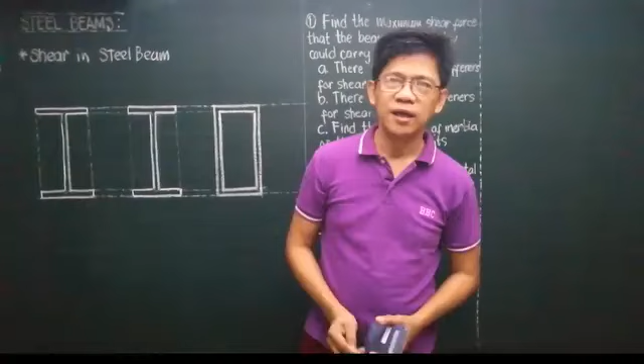Let's pray. Almighty Father God, thank you so much today. Thank you for the blessing, the goodness. Thank you for all your provision, all your kindness and love, and taking care of us. Holy Spirit, we acknowledge your presence, even in way of this virtual review. We praise you and we glorify you. May you strengthen us always. In Jesus' name we pray.

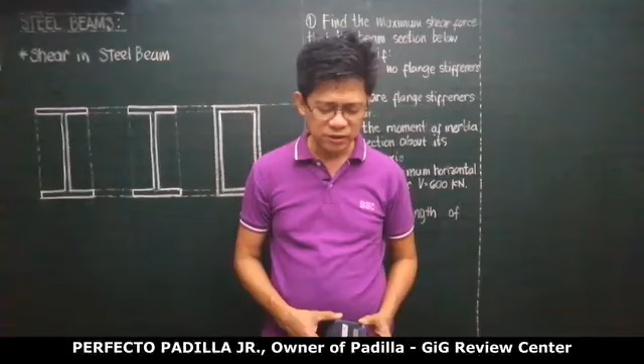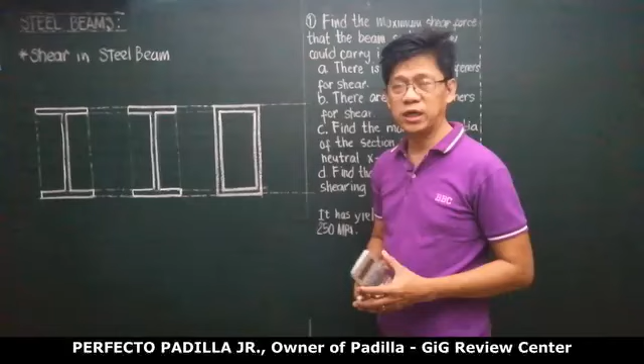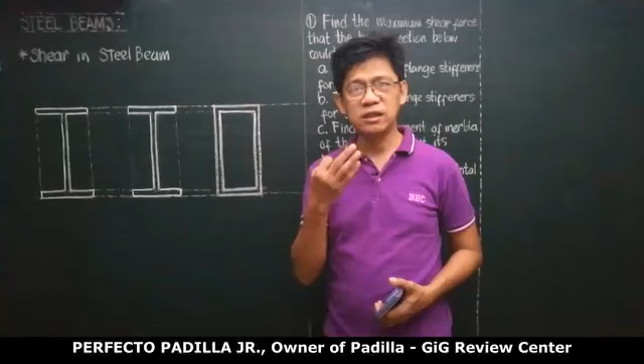We have four kinds of stress in a beam: the vertical shear, the horizontal shear, the flexural stress, and the fourth is the axial stress.

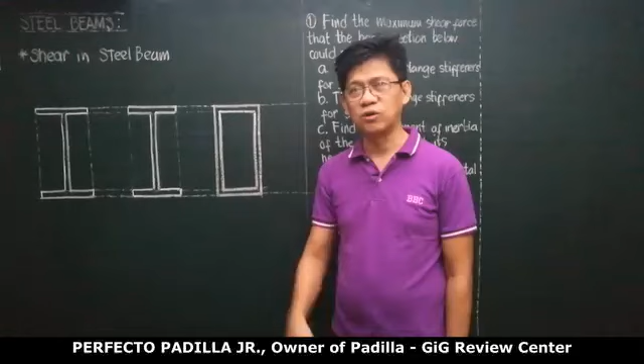So let me begin with shear in a steel beam, specifically vertical shear. Remember that stress exists only if there is resistance. If there is no resistance, there is no stress. Now, suppose I apply a vertical force here on this beam, and our reaction will be here. Okay, let me move this away so the figure isn't confusing.

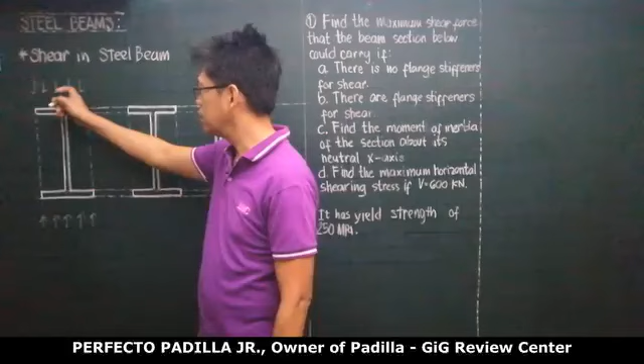Now, because of this vertical force and this reaction, remember that steel beams are made up of thin elements that are joined together. That is the way to capitalize on the high strength of steel but low weight. So here now, the main problem, because our material is composed of thin elements, our steel beam's normal failure is not cracking, not breaking, not tearing, but rather the failure is folding.

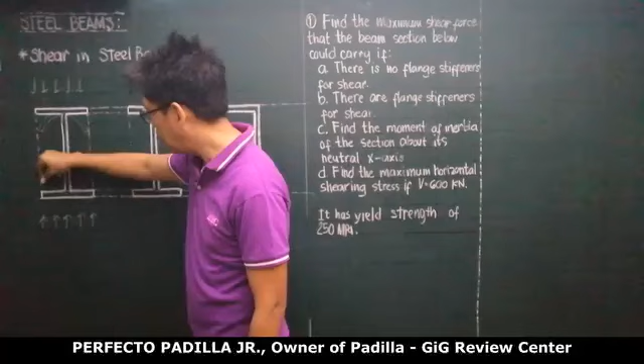So what will happen now, these elements, because they are unstiffened, meaning one edge is hanging free, what will happen is this will simply fold. So it has no genuine resistance in this direction. So this will fold here now. That means these elements, called the unstiffened flanges, will not take part in resisting the shear.

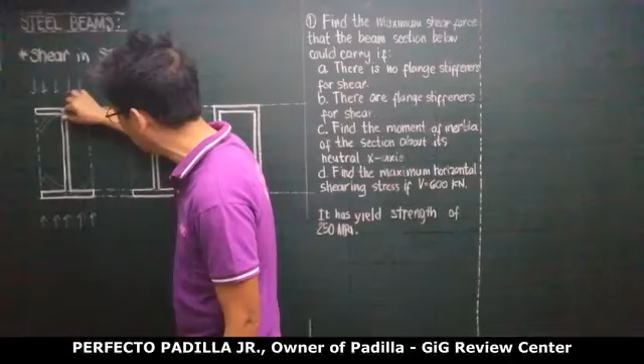The effective section here will just be the web. So the area we use here will be just the thickness of the web times the total depth of the section. Got it? That is for vertical shear. I will explain later the horizontal shear.

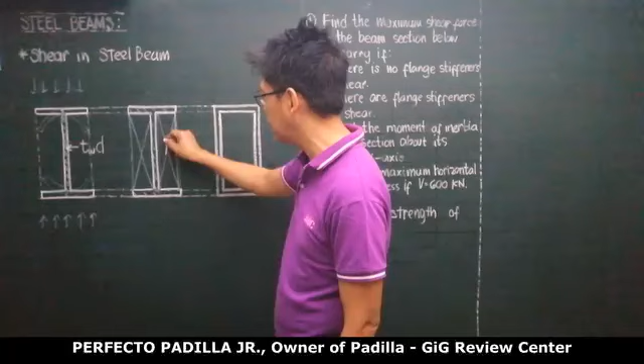So in order to utilize this, what we do is we put a flange stiffener. So our flange stiffener can be full. Okay? So if our flange stiffener is full, meaning it will strengthen or prevent folding of these unstiffened flanges. Because of that, the entire section will be effective in resisting shear. In this situation, our area for resisting shear is the entire area of the wide flange section, or the I section, or the H section, whatever it is.

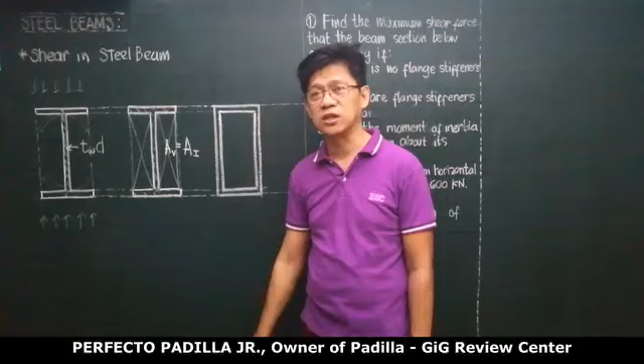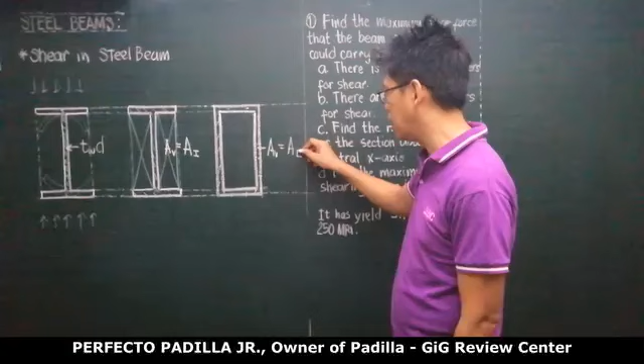Now if our section is a box beam, there is no unstiffened flange. So in this situation, the entire section is also effective in resisting shear. So our A for resisting shear is the entire area of the box section. Do you follow? Okay.

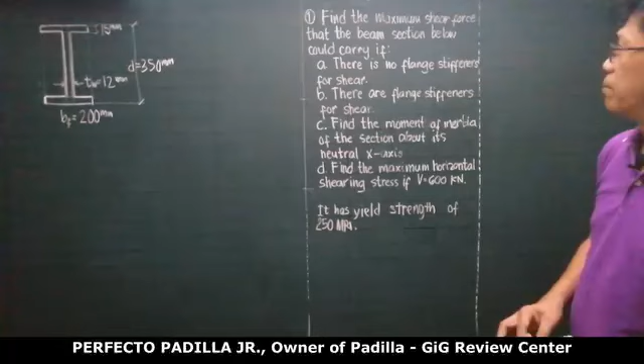Let us have this example. We're asked here to find the maximum shear force that this beam section could carry if there is no flange stiffener for shear. So obviously what we're looking for is the maximum shear force. So we will just examine it for safety in shear.

So in design, we have a universal formula used for safety. This is what I call the safety equation. For the beam to be safe, I will use an acronym here, TBS. In order to be safe in shear, there is only one requirement here.

The maximum FV actual must be less than or equal to FV allowable. Normally in design, we use lowercase letters for actual, and capital bold letters for allowable. Alright, so here, the FV actual is the maximum shear force over the effective sheared area, which must be less than FV allowable. As per NSCP, the FV allowable is 0.4 of Fy.

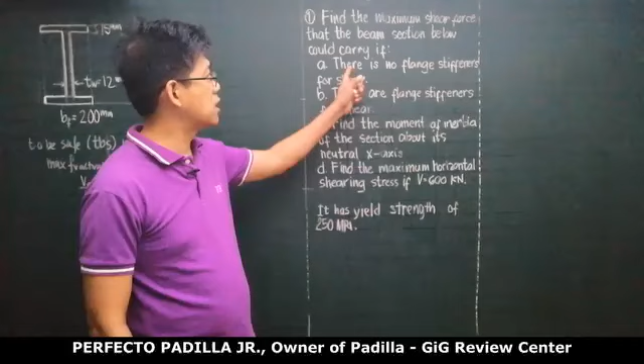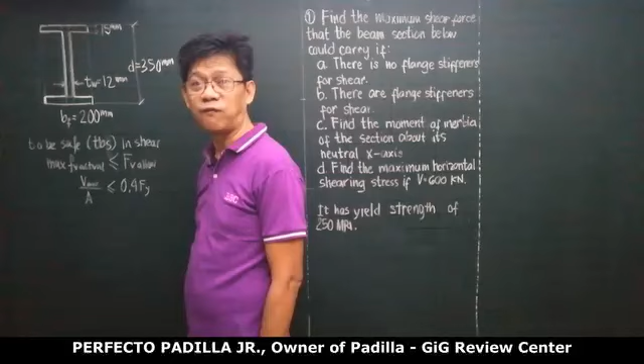So here we have Fy, which is 250 megapascal, the yield strength of steel. And all we need here is the area. In the first situation, there are no flange stiffeners, meaning due to vertical loads and reaction, these unstiffened flanges will just fold. So there is no genuine or real resistance to vertical force.

So therefore, the effective area for shear is just this web. So you have Vmax over the effective sheared area, which is D times thickness of web, 350 by 12, must be less than or equal to 0.4 of Fy, 250. So 0.4 times 250, that's 100. Therefore our Vmax here is going to be equal to or less than 420,000 Newtons, or 420 kilonewtons. Understood? Okay. Now the question in letter B, what if there are flange stiffeners?

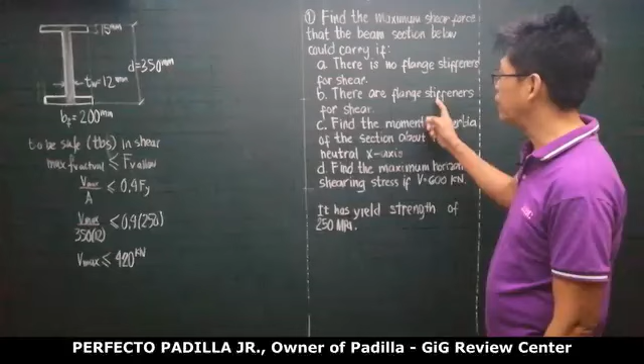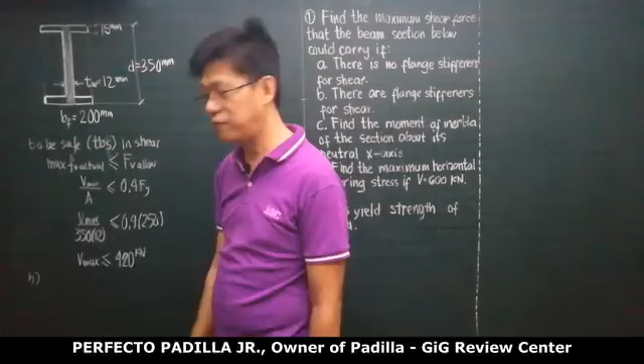If there are flange stiffeners, meaning the entire section will be effective in shear, the full section. Once there are flange stiffeners here, this will no longer fold, right? So what happens is the entire section will be effective. So therefore you'll have Vmax over the entire area. The entire area is still 350 by 12, but plus the flanges, the stiffened flanges.

So this would be, how much is this? This is 200 minus 12. What is 200 minus 12? Let me place it here. So 200 minus 12, that is the net width times the thickness, 15. So there are two of these, one on top, one on the bottom. So therefore, times 2. So this must be less than or equal to 0.4 times 250.

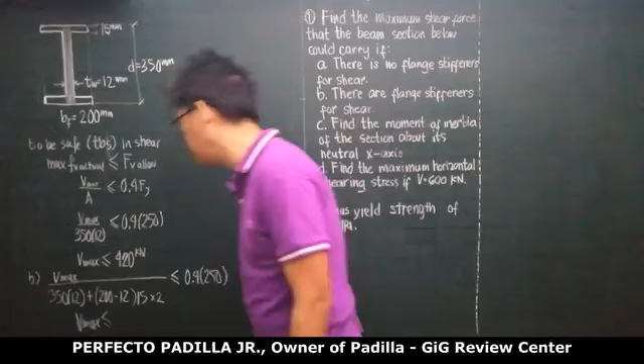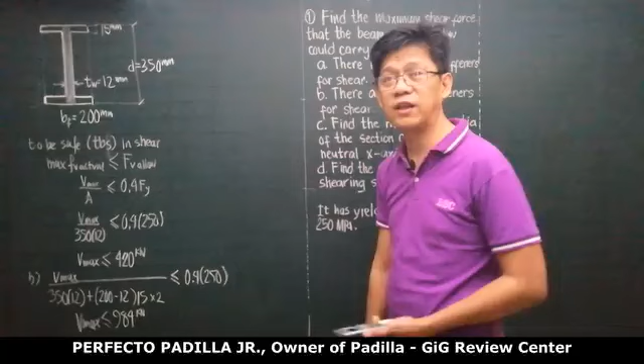In this equation, our Vmax allowable will be bigger. And that would be, so this is 984 kilonewtons. Do you follow? Is it clear? Okay, please copy.

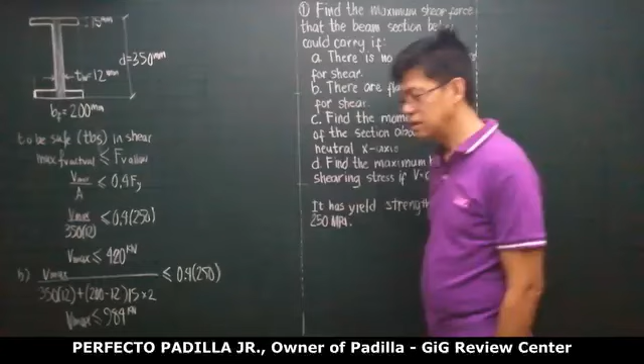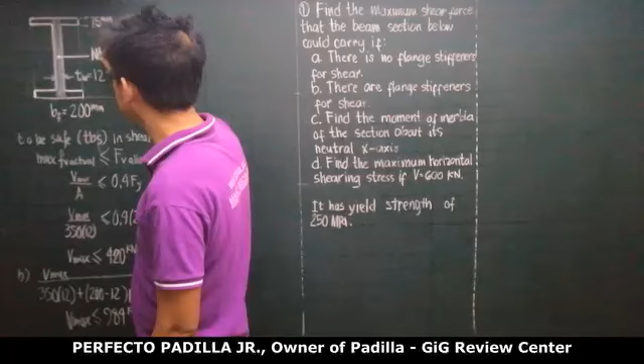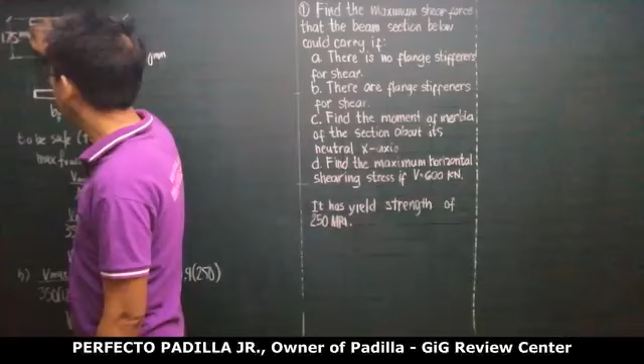Ang susunod na tinatanong sa atin, letter C, find the moment of inertia of the section about its neutral x-axis. So ang neutral x-axis nito, of course, nandito yung centroid. Kung ito 350, this would be 175, di ba?

Okay, hinahanap sa atin yung moment of inertia about that neutral x-axis. Solving it, take note that the area of the wide flange, yung I mismo, is simply area of this rectangle minus area of this hollow rectangle. Parehas lang yung location ng centroid nila dahil this is an axis of symmetry. So this is area of outer rectangle minus area nitong two hollow rectangles na pwede na lang natin pag-isahin.

So minus area nung hollow rectangle, which actually is this area minus itong web sa gitna. So we can now say therefore that I of the wide flange about the neutral x-axis is going to be I nung outer rectangle minus yung I ng hollow rectangle about the same x-axis.

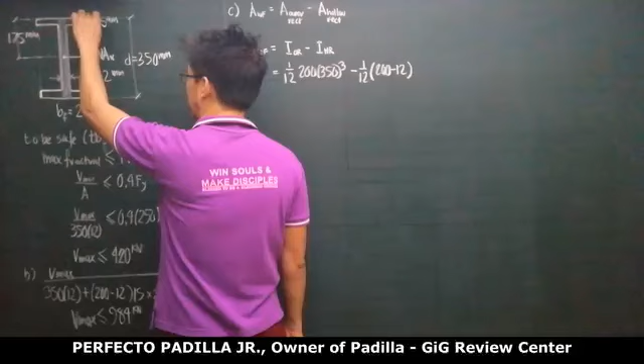So this is going to be 1/12 of base times height cube. So the base is 200, the height is 350. So this is 200 by 350 cube, minus yung hollow rectangle, 1/12 the base. Its base now is simply 200 minus 12, yung net width, multiplied by height cube, yung height niya is 350 minus 15 minus 15. So this is 350 minus 2 times 15 cube.

So you compute this and you will get this as 201.218 times 10 to the 6 millimeters to the 4th. Kuha? Okay.

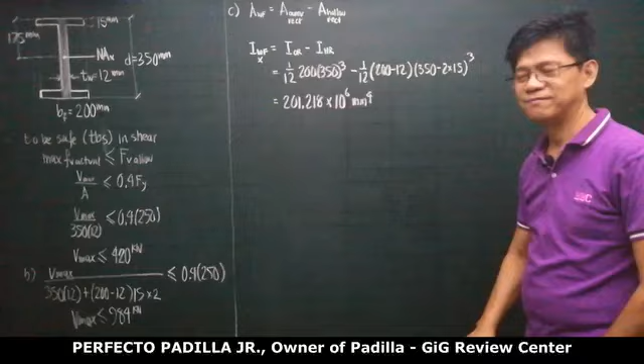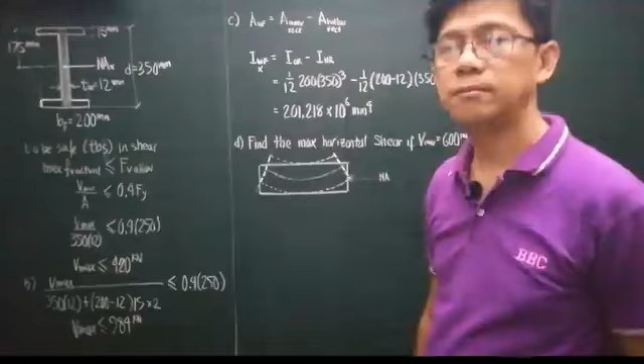Now we are asked here in letter D to find the maximum horizontal shear stress if V max is 600 kilonewtons.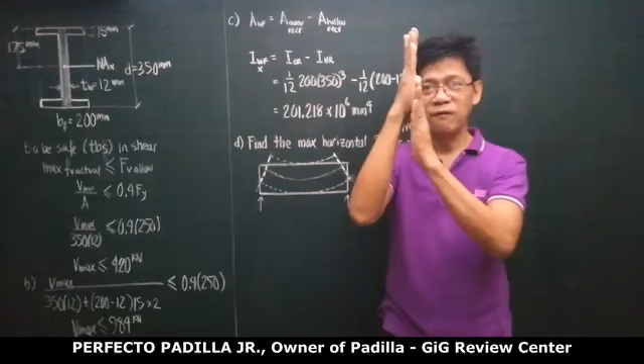What is horizontal shear? Ito yan. Kung yung beam is subject to vertical force, ito yung beam. Meron kang vertical force dito, meron kang resistance dito, di ba? Ito yung reaction, so meron kang push down, meron kang push up. So yung opposite forces na yon, push up and push down, it subjects its vertical section to what we call vertical shear. However, there is another shear that exists called the horizontal shear stress.

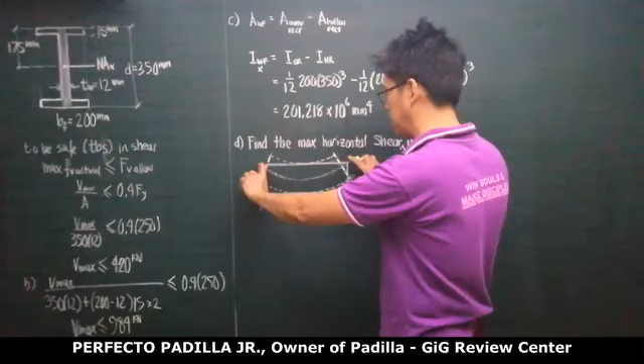And what is this? Ganito yan. Pag yung beam mo nag-bend, let us say ito yung original beam natin, then you load it, you allow it to bend. So para hindi tayo masyadong mahirapan sa pagtingin, i-maintain natin yung position nitong nasa gitna. Okay, ito yung neutral axis natin. Pag bend nito, take note yung neutral axis will remain kung gaano to kahaba, ganun pa rin to kahaba.

Right, yan kasi yung neutral axis natin, ito yung bent neutral axis. However, pag bend nito, iigsi yung nasa taas, hahaba yung nasa baba, right? So we say that this is in compression, ito is under tension. But within the elastic limit, take note, yung ating material will always tend to return to its original size and shape. Ito umigsi, ito humaba.

So gusto niyang magbalik. Ito gusto niyang bumalik sa diretso at longer than this position. Ito naman gusto niyang bumalik sa diretso at shorter than this direction kasi humaba man to. This obviously is longer than this, right? So gusto nitong bumalik sa mas mahabang posisyon. Ito gustong bumalik sa original na mas maigsing posisyon. So this one tends to move outwards, ito tends to move inwards.

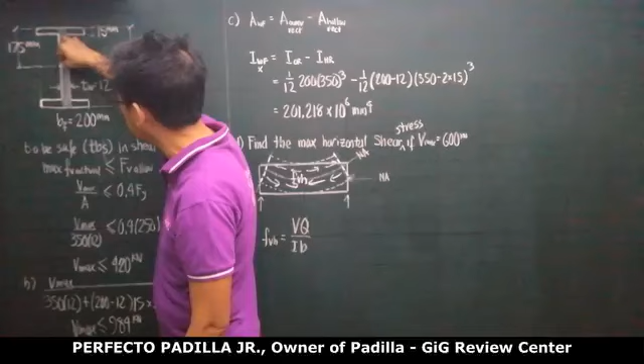Hindi ko na-derive yung formula, ha. So yung ating horizontal shearing stress is given by VQ over IB. Yung V, 600. Yung I about always the neutral axis. Ito yun. Yung B, take note, since maximum yung shearing stress at the section dito, yung V dito, yan yung B. In this situation, our B is going to be equal to the thickness of web. This is 12. Meron na tayo nito.

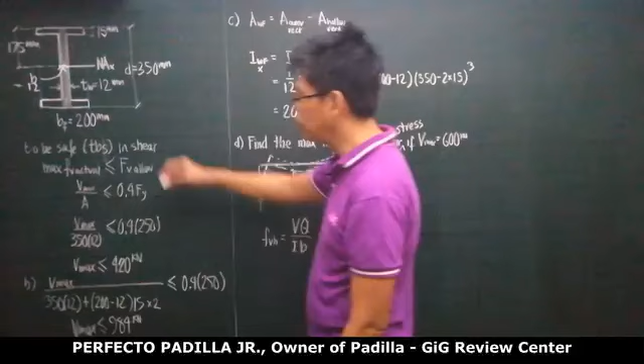Ang kailangan na lang yung Q. But what is our Q? Yung Q natin is simply the summation of moment of area about the neutral axis, pero yung area either above or below the section, so times Y about the neutral axis. Now kung ito yung section natin, yung area above, ito, yung T na yan, yung area below, yung T na to. Yung moment of this area about NA, obviously because of symmetry, is also equal to the moment of area below. So let me just consider the area above for illustration's sake. Ito.

That one, so hatiin ko yan sa dalawa. Etong area na to, ito na lang, ganito na paghati ko. Kung ito ay 175, ito ay 15, this must be what? 175 minus 15, 160. No? So, therefore, etong area na to, this area is 160.

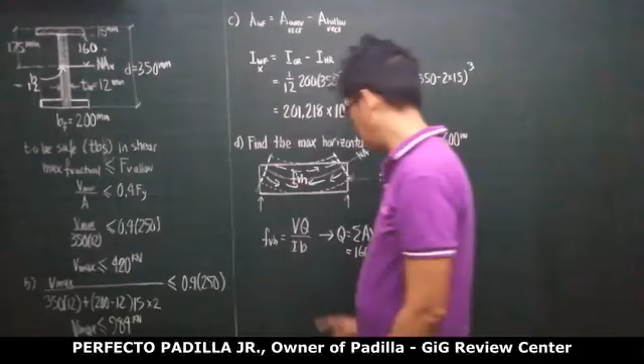This is 160 by 12 times its moment arm about the neutral axis. Ang centroid niya nandito. Kung 160 to, then this must be 80. No? Plus, this portion, eto, isang buo to, di ba?

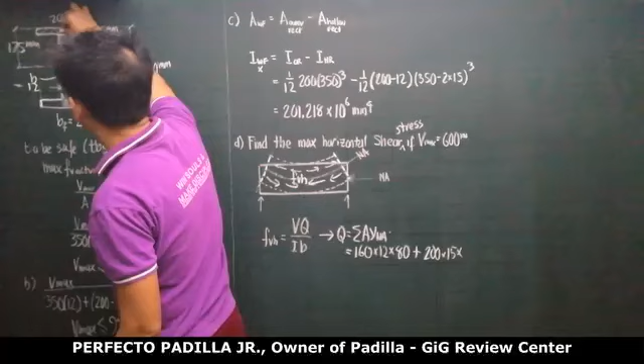Ang paghati ko kasi, eto, saka ito. So this will be 200 by 15 times its moment arm. This is 160. Ang centroid niya ito. So yung moment arm niya must be this one. So it is 160 plus 1 half of 15, that is 7.5. So the moment arm is 167.5.

So therefore, if you compute this, you will get here 656,100. Naintindihan? And the unit is area times Y, millimeter cube.

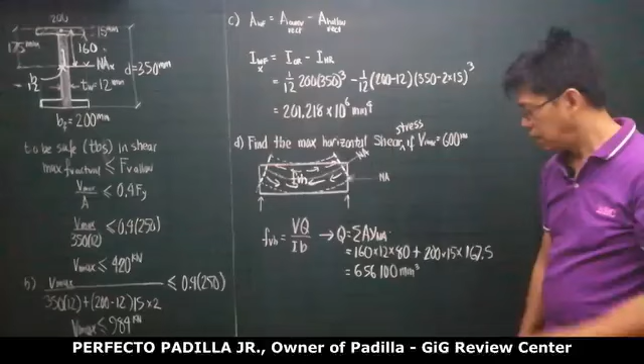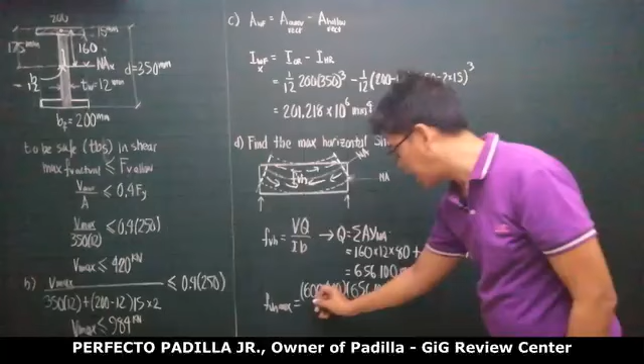So substituting here, our FV horizontal maximum must be V maximum 600 kilonewton, or that is 600,000 newtons, times our Q, 656,100 over I. The I is 201.218 times 10 to the 6 millimeters to the 4th times the B.

The B is 12. So you compute this and you will be able to get this as 163.03 megapascal. Naintindihan? Okay.

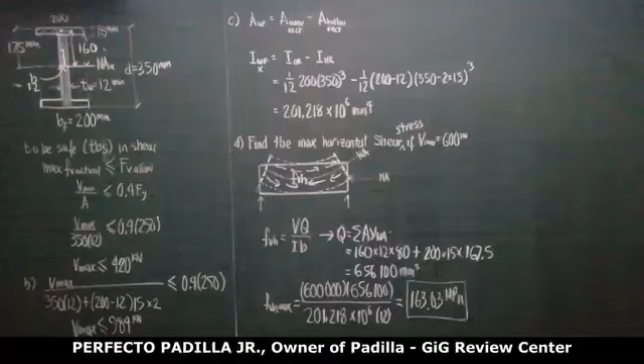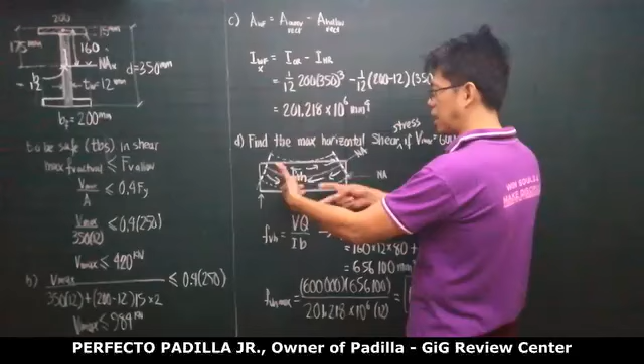Now there is a third kind of stress, yung tinatawag nating flexural stress. As you can see, di ba sabi natin, pag nag-bend to, iigsi to, hahaba to. Umigsi to because of the compression here, humaba to because of the tension here. Right? And take note, etong bending na to is brought about by moment.

So ang ibig sabihin, meron kang moment, for example, ikat natin tong section na to, meron kang moment in this direction, dapat yung ating section will react in such a way to produce a counterclockwise moment. No? Kaya dito, ang reaction natin is, kung ito yung neutral axis, every element of this will produce counterclockwise moment about this section or about this axis.

So yung taas will produce compression. Ito will produce tension. Kasi this one will be counterclockwise about the neutral axis. So tension yung baba, compression yung taas.

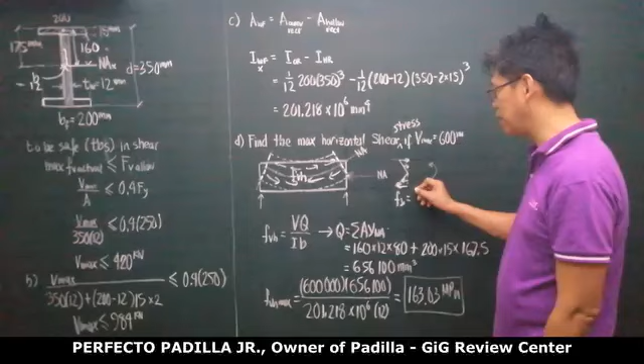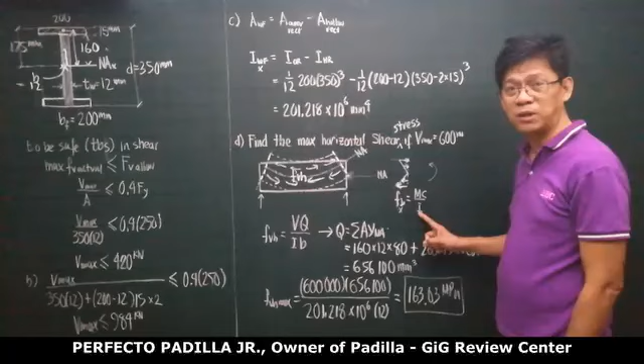And this is given by, yung FB is given by MC over I. Kung ito FB about X, this is moment about X. Kung ito FB about Y, this is moment about Y. Kung ito FB about Z, this is moment about Z. And I will be respectively IX, IY, IZ. Yung IZ na tinatawag is also known as the polar moment of inertia.

Now paano natin sinosolve yung allowable bending stress sa beam? Yun lang yung madadagdag sa topic ng steel design as far as flexure is concerned. Paano nga ba?

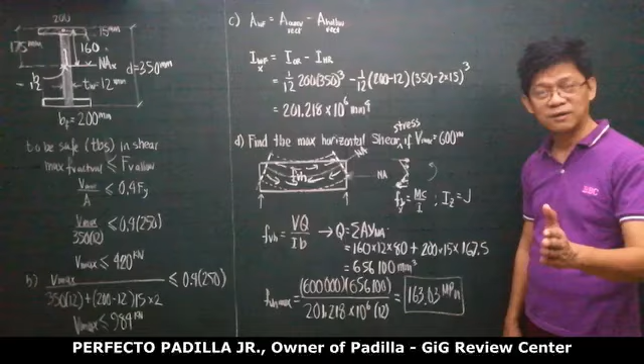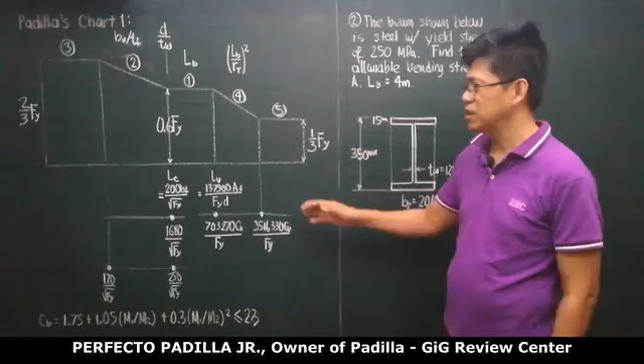How do we solve our allowable bending stress according to AISC or our NSCP, National Structural Code of the Philippines? Marami yung mga provisions na yon, pero I summarize it with this chart, the Padillas chart. So para tong hagdan, no? 3 steps, pero merong slide, 2, no?

So ang tatandaan natin, katulad ng sabi ko, sa steel section, ang failure niya, bihira ang tearing or breaking. Kadalasan, ang failure is due to folding. They may also be called crippling. Okay? So dito, kaya nagfo-fold ang isang element dahil mahaba at manipis.

So tandaan natin 3 dimension ang beam. Isang longitudinal, isang thickness, isang width. Okay? So ang pinakamahabang dimension ng width is the length. Pero take note kung ito yung beam natin. Halimbawa, ito yung beam section, di ba?

So ito, kung nandito yung support, this is the loading. Yung bending in this direction is expected, kasi talaga namang nandyan yung load. Pero meron tayong tinatawag na lateral bending. Okay? So pwedeng mag-bend yan laterally kahit ang load nandito due to length.

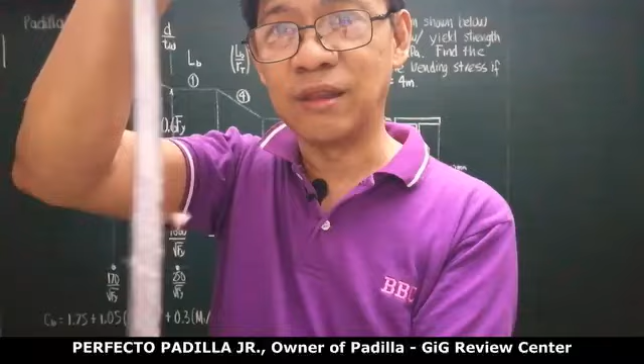Kahit na i-load ko yan dito, nagbe-bend siya dito. Pero ang load na ina-apply ko pag ganito, ang moment na ina-apply ko pag ganito, pero kahit na ganun ang load, yung beam magbe-bend laterally. Yan yung tinatawag natin na buckling. Wala kang in-apply na load dito, pero may bending in that direction.

Pag nag-buckle yung beam natin, imagine ganito yung beam. Eto ha, ang load nandito. Pero kung yun ay nag-buckle dahil sa load, nag-buckle ng ganito, nandito yung load, hindi ba magkakaroon ng twist pag ganito? You get it? So magfe-fail yung beam.

Ang pinaka-critical sa beam is yung longest dimension niya, yun yung tinatawag nating LB. Yung LB may be different from the span. Kasi ang span ito, vertical support to vertical support. Pero ang LB, yan yung distance between horizontal braces. So kung walang horizontal braces dito, walang horizontal support, then LB is equal to the span.

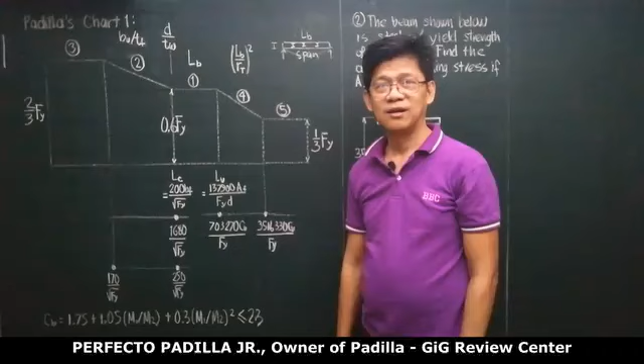Pero kung meron kang halimbawang auxiliary beam dito sa gitna, so ang LB mo, 1/2 of the span. Kung meron ka every quarter na support beam, lateral beam, then ang LB mo is 1/4 of the span. Naintindihan? Now, magbabakel yan laterally if LB is too long.

Ano yung long, ano yung short? Dapat ma-define. So i-define yan ng NSCP. Ang entry point natin dito sa Padilla's chart is etong region 1. Ang tatandaan nyo lang dito, madaling kabisaduhin yung code, basta alam nyo tong Padilla's chart, no? Ang FB natin varies from a maximum of 2/3 Fy to a minimum of 1/3 Fy.

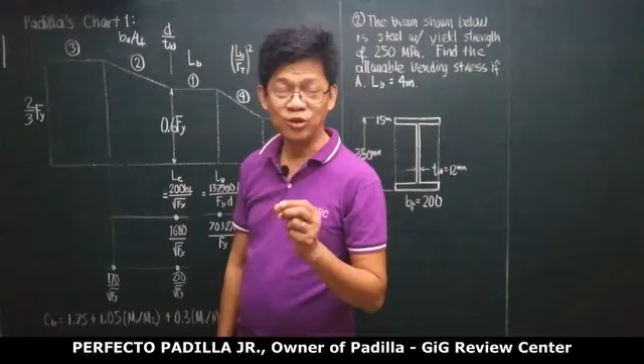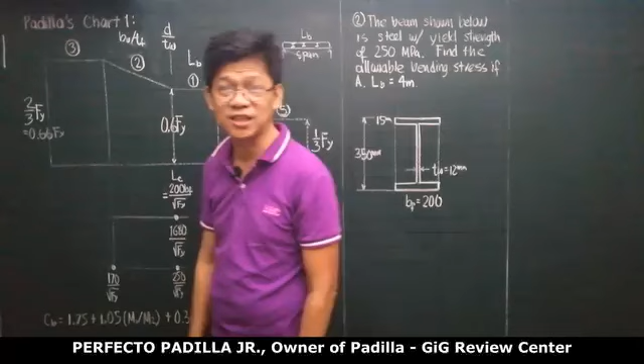So dito, yung 2/3 Fy, however, hindi nyo to makikita sa libro. Ang makikita nyo sa libro is 0.66 Fy. Kasi yung 2/3 ay 0.66666666 Fy. Lumagay sa conservative yung AISC, ginawa nilang 0.66. Pero ang exact value niyan is 2/3. Ang sabi ko, exact value based on the spirit or logic ng code, ha? Sa pagka-analyze ko lang ba?

Ngayon, dito, kapag yung ating LB is less than LU, ang standard natin na ginamit LU. Madali mo rin tandaan, yung mga NSCP or AISC limits sa kaliwa ng region 1, puro over square root of Fy. Dito sa right side, puro over Fy. Naintindihan? Yung nandito, square root of Fy family, eto, Fy family. Over square root of Fy, eto over Fy. Now, dito sa kaliwa, yung LB, you've got to check it also against LC.

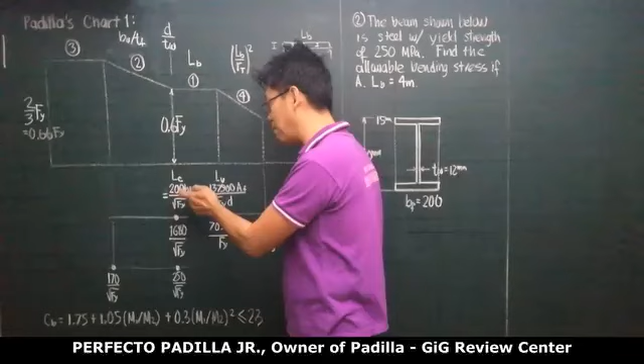Yung LC, isipin nyo lang si LC, eto yung babaeng 200 ang boyfriend. Grabe, no? Yan si LC. So yan yung lateral length para sa maturing na compact. Kaya LC, ito yung lateral length para ma-consider na supported. Okay. Now, pag yung LB is less than LC, ibig sabihin hindi yung critical sa lateral buckling.

Naintindihan? So and candidate yan for compact. Okay, pag-aralan muna natin to para makita nyo. The beam shown below has yield strength of 250. Find the allowable bending stress if LB is 4 meters, or 4,000 millimeters.

So una, i-check natin yung LB saka yung LC. Yung LC natin, ito yung babaeng 200 ang boyfriend over square root of FY. So therefore, this is going to be 200 times BF, 200 over the square root of 250. So you compute this, your LC is going to be 2529.8, the unit is millimeters. Parehas siya ng unit ng ginamit mong BF. All the quantities are dimensionless lalabas, ha? So therefore, this is LC.

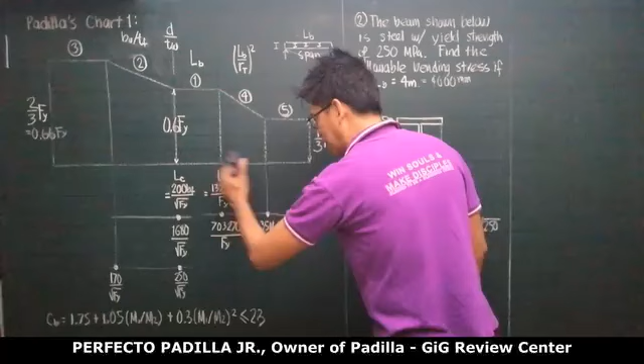While our LU is equal to 137,900 — lahat ng odd one-digit variable or number nandito except the middle, yung 5. So, 137,900 AF over FYD. Yan yung ating LU, ha? Yung nasa kaliwa over square root of FY, yung nasa kanan over FY. Parang 137,900 AF over D over FY, ha? So therefore, this is going to be 137,900 AF.

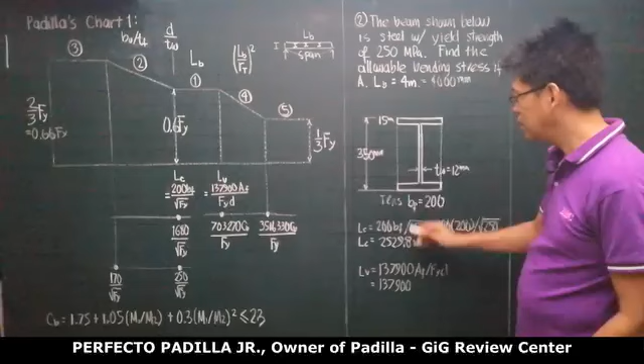Yung AF na binabanggit dito, hindi yung lahat na lang ng AF. Yung AF na binabanggit dito, area of compression flange, no? So dito, take note, pag bend nito, pag ganito, etong nasa baba is under tension, etong nasa taas is under compression, di ba? So yung flange under compression, ito lang yon, isa lang. So therefore dito, yung flange under compression is 200 by 15. Hindi mo imumultiply ng 2. Yung under tension kasi, hindi yan magbe-bend. Imposibleng ang isang bagay, hinatak mo tapos nag-bend. Hindi magfo-fold or magbe-bend yung portion under tension.

Okay, now dito over FY is 250 times D. Ang D is 350. So you solve this, makukuha mo na yung LU is equal to 4728 millimeters once you compute this. Notice na ang LB natin, our LB which is 4 meters, is less than LU, but greater than LC.

It is between LC and LU. Pag ang LB mo is between LC and LU, ibig sabihin nasa region 1 ka ng Padilla's chart. Naintindihan? Madali lang intindihin yung code pag naintindihan mo yung Padilla's chart, diba? Hahanapin mo lang kung nasaang region siya, pero dapat alam mo kung saan magsimula. Magsimula ka sa longest dimension. So dito, therefore, this beam is in region 1 of Padilla's chart.

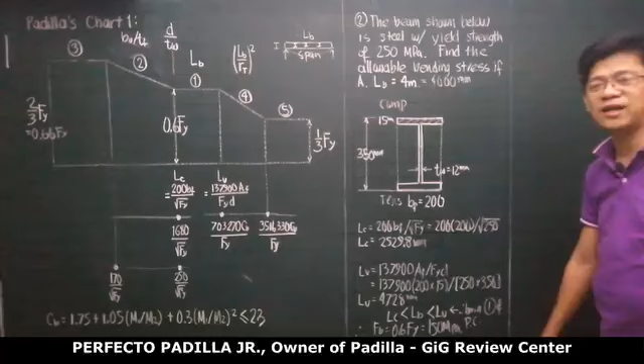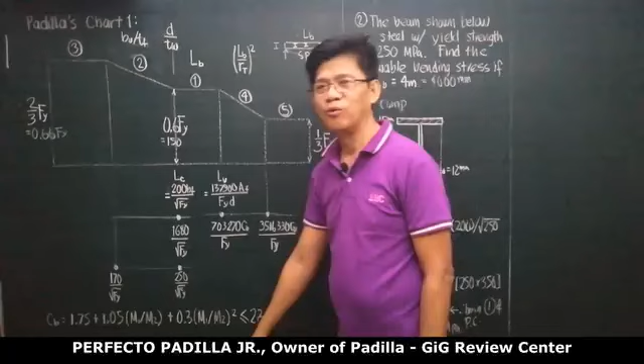Kung nasa region 1 siya, therefore, yung ating FB allowable equals 0.6 of FY. 0.6 of 250, ano na yan? 0.6 of 250 is equal to 150 megapascal. Naintindihan? So ito, itong 0.6 of FY is 150. Pag nasa region 1 ka, 150 ka. Naintindihan? Sige, pakikopya.